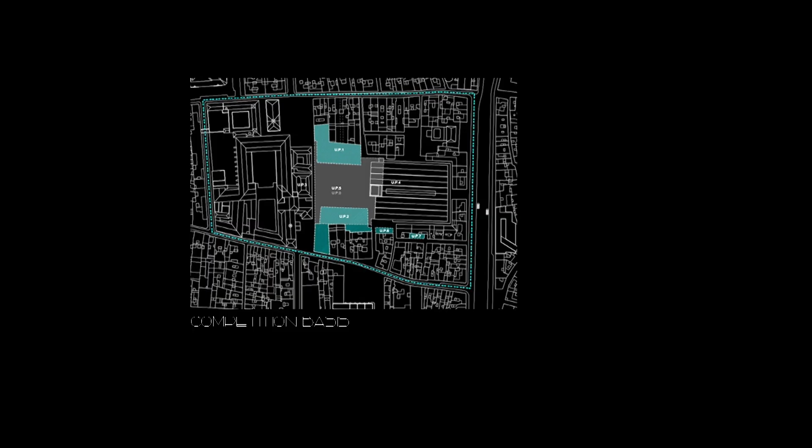And in a way, the competition gave this idea of geometry, and I said, no way. I don't want to express that, because on one side is housing, on the other side is a school. This is an area where a lot of different social classes cross over one another, and I wanted to express that.

I say it doesn't matter if this facade is beautiful or not beautiful, I don't want to stop this movement with a facade, with a block. This was the first thought and the first line that I made, to continue the facade of the building with my intervention.

And I draw and I make models with paper, it's my people that manage the computer, as you see. Okay, doesn't matter. You see at the end, there is the corner of the new school.

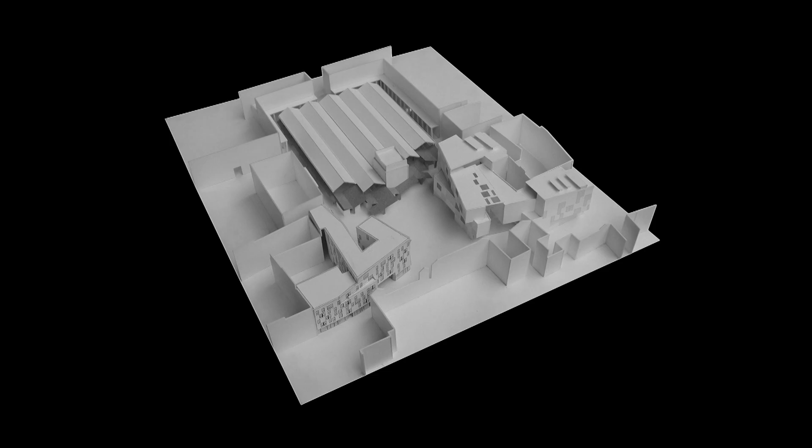The solution came when I thought: I'm going to dialogue with the roof, trying to find a solution to these 3 problems. The solution was to make a roof of small dimension that controls the sun, and this roof passes underneath the big one to also control the wind and rain - the protection for the wind was inside.

Also important for me was to put this building that you find in the middle into second line, passing this roof in front of it - this building that had too much protagonism in the past now passes into second line.

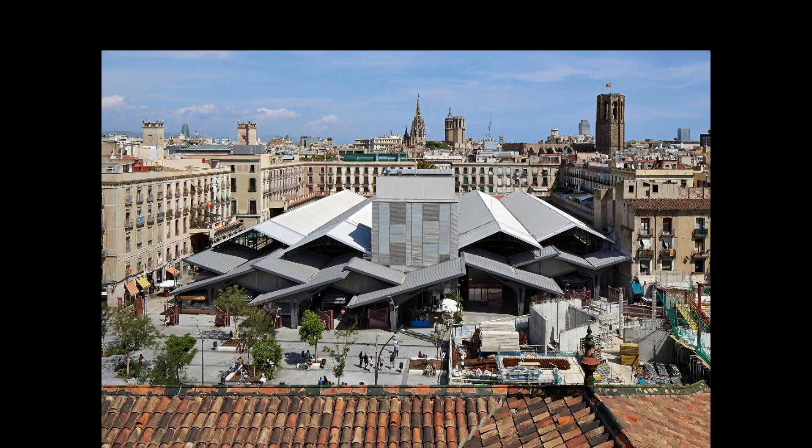This is La Massana, under construction. You see how I follow the rhythm, I enter into dialogue, because this space is a square where I make 3 facades.

But I didn't want to make my own square - I wanted to be part of the city, to sew it together. It's correct to see so - to sew the city that was broken in the middle. I wanted to sew, but enter in dialogue with everything I have behind.

You will see that here, the Boqueria - I talk with the Boqueria also, because the Boqueria has a strong memory for us, for the people of Barcelona. I make some continuation of the Boqueria. And you will see the housing - I also follow, entering into dialogue with the houses that are behind and near me.

We can go quickly through this. This is the housing. Again, we are here now.

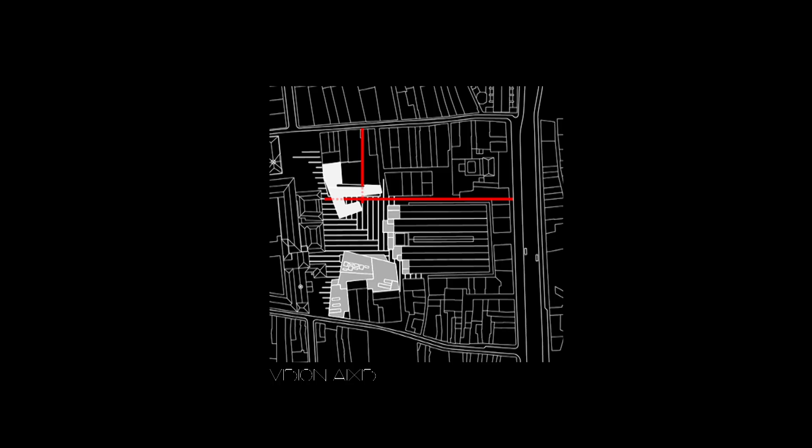This is the thing that worries me - this connection, not to interrupt this movement with my building. Because this movement was existing before me, and I say I want to respect all this movement because it belongs to the citizens. So I follow the thing that I find before me.

I must say here that all the square is empty, but nothing shows that it's empty, because the ramp to enter and also the ramp to go out is inside the intervention. And also all the ventilation is inside the new intervention.

We have enough air, and I make some kind of prominence - the square is like a big mound to have enough earth to plant trees. But also, to emphasize this angle and point of view, I plant trees only in this area, leaving this other part completely empty, because from here you have the perspective of the school, and it permits this area for activities and for meetings.

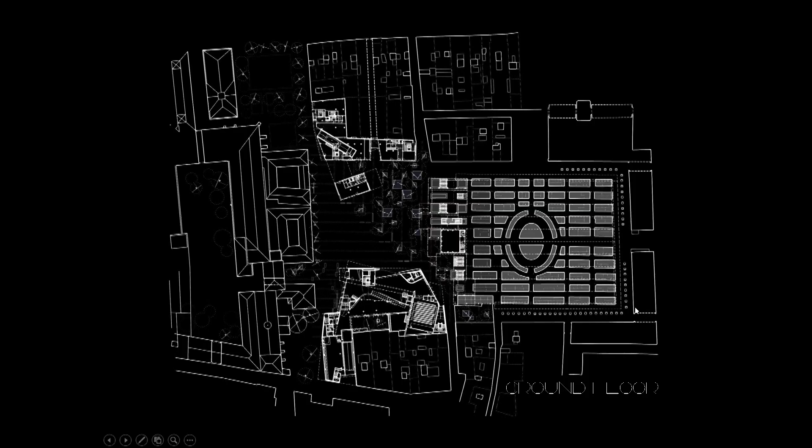Yesterday we talked about ornament, and I say that before, through the ornaments, the building had some kind of rhetoric and particularity. Nowadays it seems complicated, I don't know, architects don't manage to work with ornaments. To me, I find this plastic quality with the movement of the facade. I try to make in my buildings some kind of particularity, because each window is different, if you have a house here, this is your house, your window that is different from the others. And in a room, sometimes the window is on the side of the room, and others, and I try to make this abstract composition to give some kind of quality to the facade.

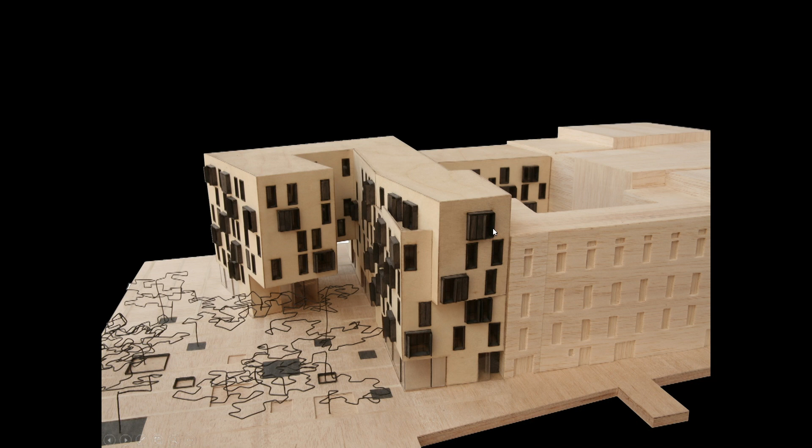And also, for example, the saloon, the living room, has the window up. I mean, the window is inside the wall, in contraposition, the living room is like a box that goes out. And that also creates not only movement in plan, but also in section.

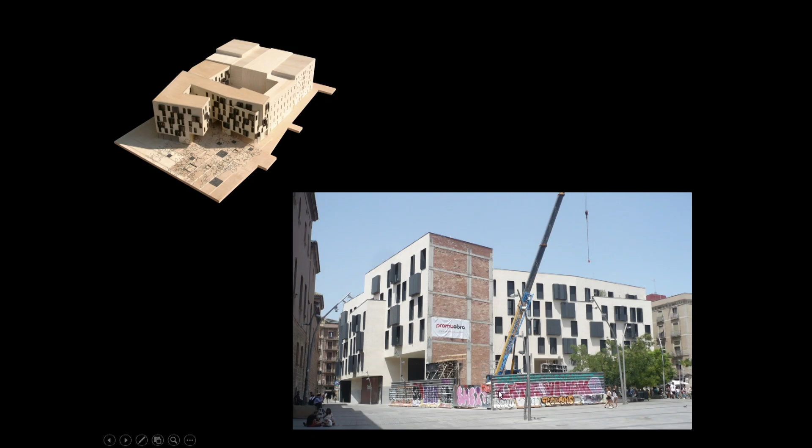You will see, we can pass. This is under construction. Here is the place, this part is private, and it's the legs, with the cantilever. It's going to be finished in 8 months, more or less. We can pass. This is the cantilever, and you see the corridor. We pass, and this is again the perspective.

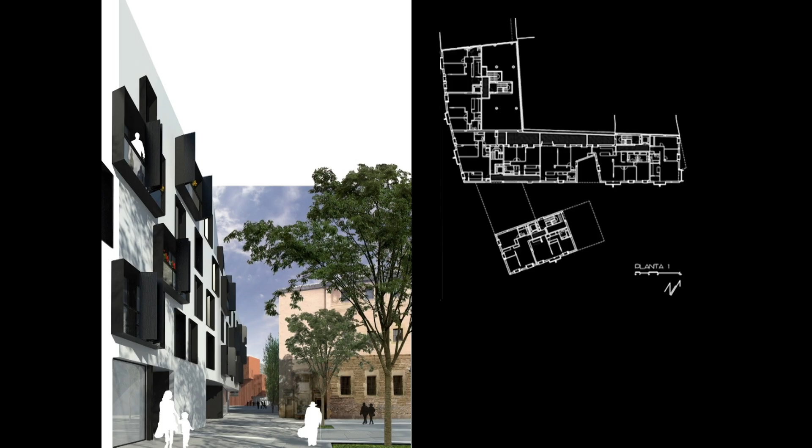We can pass. It's an abstract composition, but you see how the housing, I try to work with the same scale as the building that I have behind, the housing buildings, that the dimension is a domestic scale. And I try to work with the same scale in another composition, but following the same, and also all this movement, not to make amplification but to make the movement from one side to another with fluidity. We can pass, okay.

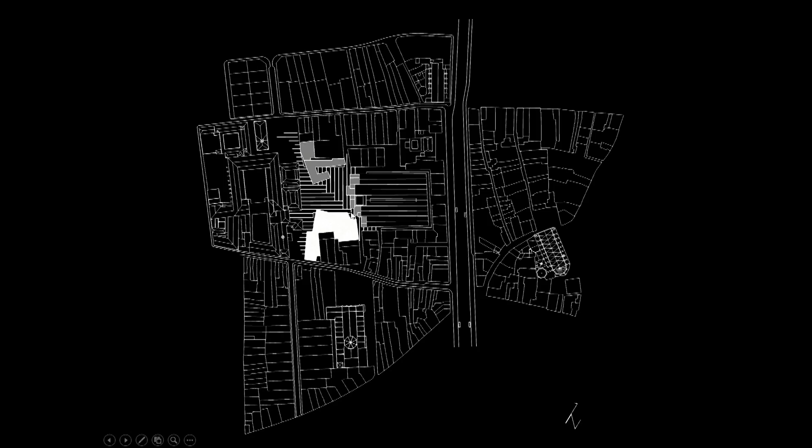Okay, we pass. Now the school, we are working here. I must say that this building is quite big, 11,000 meters, and 6 floors. It's big, and I wanted it to appear small. This was my worry, my preoccupation. And also, because this is an institutional building, here I work with a big scale in contraposition to the housing, where I work with domestic scale.

I must say that this school was here before. This is an old hospital, Gothic and Baroque, that for years has been the oldest school of Barcelona, of art. And they had this courtyard that belongs to them, protected from all the tourists and all the movement of the neighborhood, and they were very sad to move. But this building was not conditioned for fire, and they had a lot of problems, and the municipality decided to transform this into a library and to move the school here.

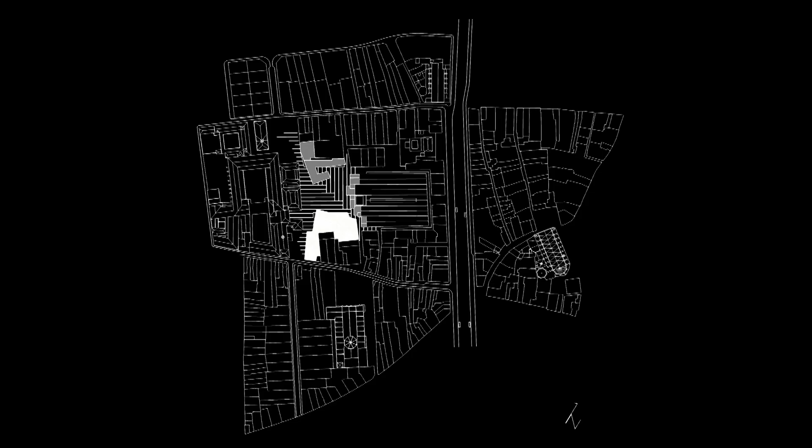And when I entered the competition, I went to talk with the professors, the teachers, and they asked me, they said we are worried to move into a very urban school, we want open spaces. But it was not possible to make a courtyard, and I thought of terraces. Okay, we can pass, and I make this small movement, you see, also to create terraces, and also because, as I explained before, I didn't want a building facing the center of the square. I wanted to give the square some dynamism.

And making this collapse, this movement, also permits to change the scale, you will see later, and to create all this terrace that is the place where the students go out, no? And how you see, the plant is so easy. It's two L's, no? This and this.

All the workshops are facing the street. This is the corridor, and here again the theoretic and administration face the courtyard. Here is a big courtyard. At the end of the corridor, because from this part of the building to another there is a different level, I communicate this L with the other with these stairs. And at the end of these stairs you find a terrace.

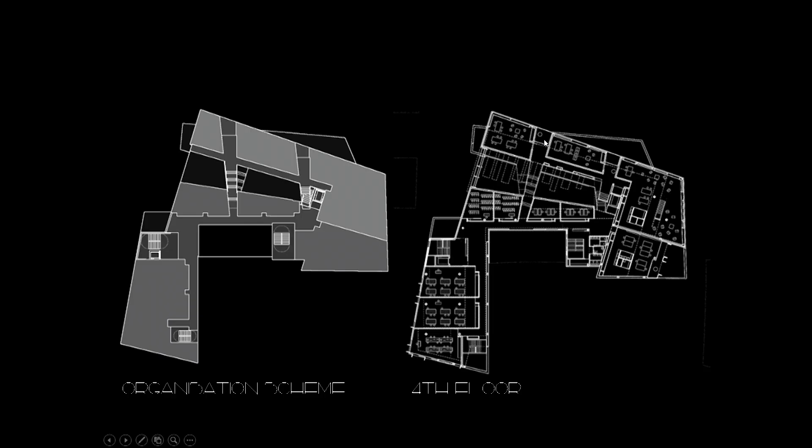I talk a lot, but the image is much better than my talk. We can pass. This, you see? Also to change the scale, no? Because you realize it's 1, 2, 3, 4, 5, 6 floors, but with this small movement, with this composition more abstract, you don't realize well the dimension of the building.

First, how I've broken it in two pieces, it seems smaller, no? And also the end of the stairs is changed. If I make one stair over the other, the reading of floor 1, 2, 3 is too easy. By making this small movement, in a moment one stair is here and the other here, and also when I arrive here, I change the composition of the hall, so this terrace is more aleatory, and the perception of the different level is not so clear.

And again, the corner is the point where I make the cantilever, is the point where I make the break, and this corner, that you see from far on the street, is the point of more tension of the building.

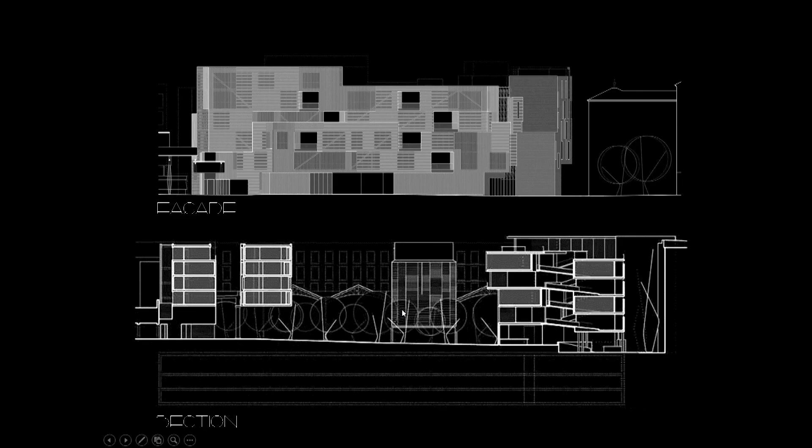We can pass, and here you see, no? Okay, this is the drawing from the competition. You see, here the roof doesn't exist, because in the competition - and you see how this awful building had enormous presence. When I received the commission at the end of the Boqueria, I was very happy because it gave me the possibility to control this bad animal.

We can pass, yeah, here. And you will see also this piece of brise-soleil is handmade - not really handmade, but it's not industrial, it's semi-industrial. And you see how it has a lot of different colors, because entering the oven in small quantities, each time the color is different. But I wanted that - I wanted that to give vibration. And also these errors, this quality of the material that is not homogeneous, makes you feel the material more.

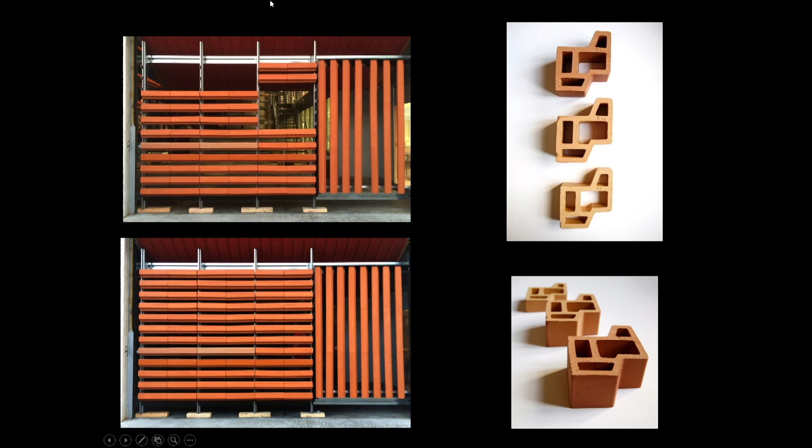Okay, we can pass. This is the brise-soleil. This is a proof - it was not ceramic, but sporex, to control the different distance. But you see the piece, no? The piece where the light enters here, but from the back. From the city you don't see the interior, but from inside you see the sky. We can pass. As this, we can pass.

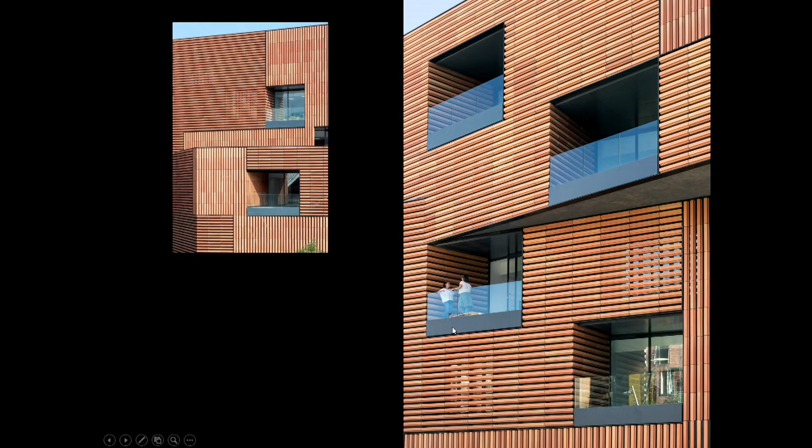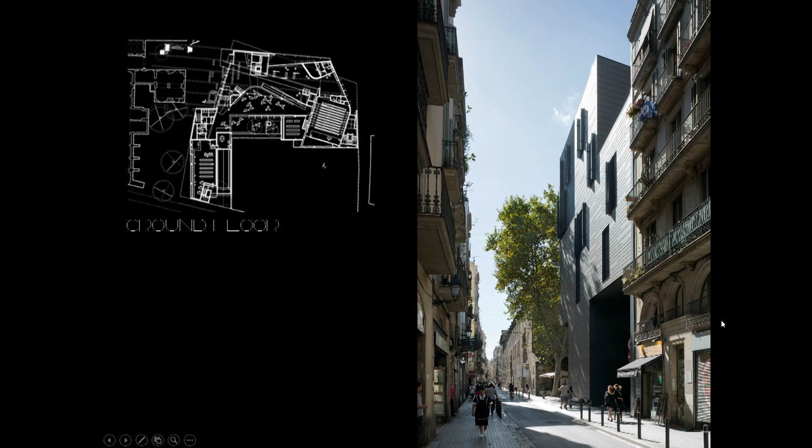When I arrive at the street, you see the building's back part is flat, more in the color of the surrounding, and the windows are smaller, not domestic, because it's a school, but more in consonance with the building near us.

We can pass. The same, no? And also trying this again, a cantilever, to face and connect more with the street and have more perspective. Also because in front there is a terrace, a theater.

We can pass. And here you see the corner. And in the interior it's completely different. I wanted it to appear like something more sculptural, more massive, protected from the exterior.

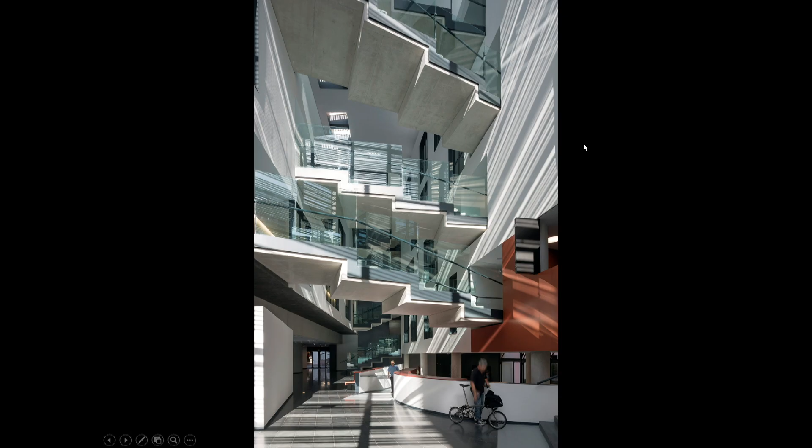But when we are in the interior, there's a lot of sun, and you perceive all the time where you are. This is the street, the stairs that move, and it's beautiful because in each moment of the day the shadow changes. This has some relation with the pavilion.

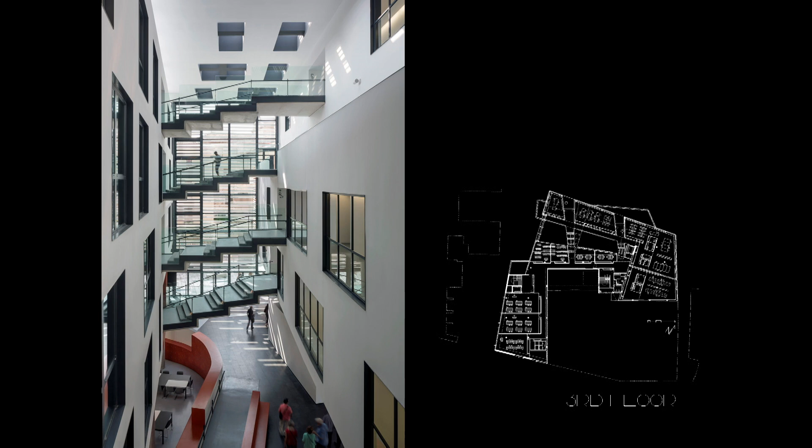That was made by the same architect, so it must have some relation.

Here, I wanted to transform this courtyard into something like a street. And the fence of the corridor, instead of appearing like a fence, appears like windows, the same as the windows of the classrooms, and the third facade is the ceiling.

This is the ceiling, and it can open. I am very worried about the circulation of air, so I made a project with transversal circulation.

If you don't want, they make me the obligation of mechanical ventilation and air conditioning, but this building works with no mechanical technology, because of the circulation of air. All this is open, and when it's very hot we can open it. Not always open, but they can open.

We can pass. And the interior of the classroom, the workroom, the studios - you see it's transparent enough, but from the exterior they are completely solid.

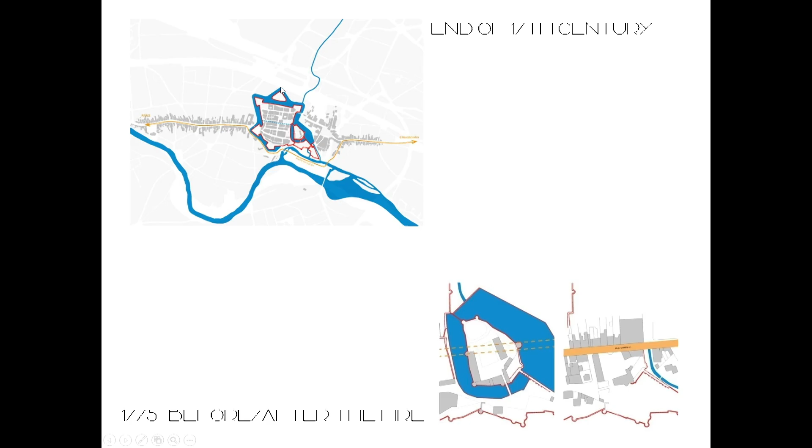And they decided, with no problem, to cut through the castle to connect this street with the other, and that's all. Things started to disappear because the need for the walls of the city as protection of the frontier was gone, and it became an industrial city.

We can pass. This is the period that started making canals, because Saint-Dizier became a place for foundries, for iron foundry. All the furniture for the city, in the industrial city, all the benches were made in Saint-Dizier.

And they created all the canals to transport the material. But today Saint-Dizier has disappeared as an industrial place in this way, and they don't need the canals, and again all the canals disappeared. So Saint-Dizier is a city that is very difficult to recognize its history, because part of it belongs to things that are dead.

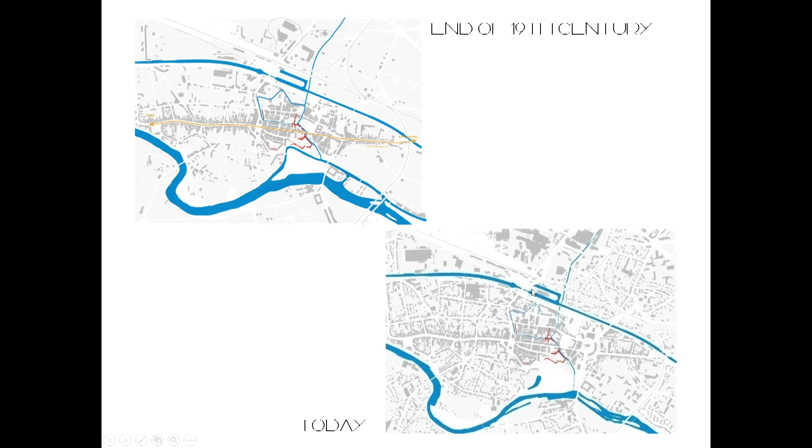And I try again to show not only the space, but to show the history. You understand? To show the identity of the village.

We can pass. This is the scene showing that all this was made in Saint-Dizier. They used to make this kind of things. All this was made in Saint-Dizier, but no more.

Maybe we can pass, we can go back. I changed it, but no, later. This is my project.

I also like, when I work at a big scale, to transform each project into a very simple sketch. And this is the project. What is this project? This is the canal, this is the river.

And I said, I want to make a promenade, an open space, because nowadays the public space is different, because people don't just promenade anymore—they do footing, bicycle, they are much more dynamic. It's not like before, walking with an umbrella, with the baby. It's more dynamic. So I said, okay, I'm going to make a longitudinal public space.

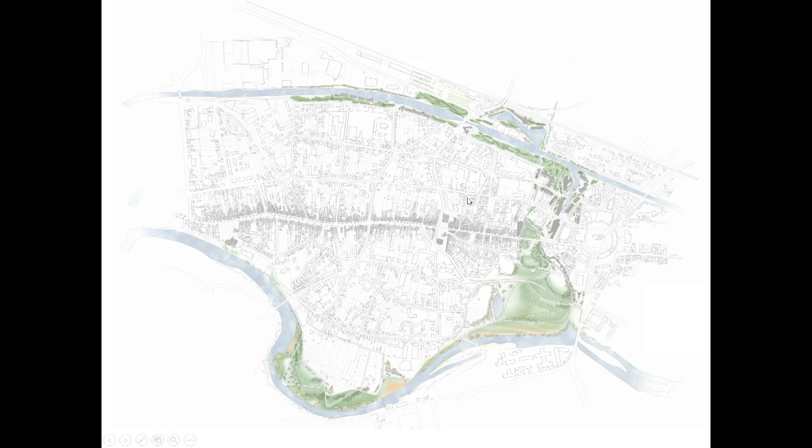Now we are doing all this area. I don't have a photograph, but it doesn't matter. It connects with this existing square, all the acts of commerce. Okay, we can pass.

Okay, and I present my actuation, the image with which I won the competition, which is working but with a lot of changes—but essentially it's okay, it's working. We can pass.

This is the transformation, you see the castle. I made it in front of the castle. I suggested to them to move the market that was there—sorry, here—whoops, disappeared.

Here, the market that was here, I propose to remove it, and to create in front of the castle a public space. And also the canal, I bring the canal inside a little, and near the canal houses, and make the concentration of houses in high buildings, to make the transition to the high buildings behind. I try to give some coherence to this.

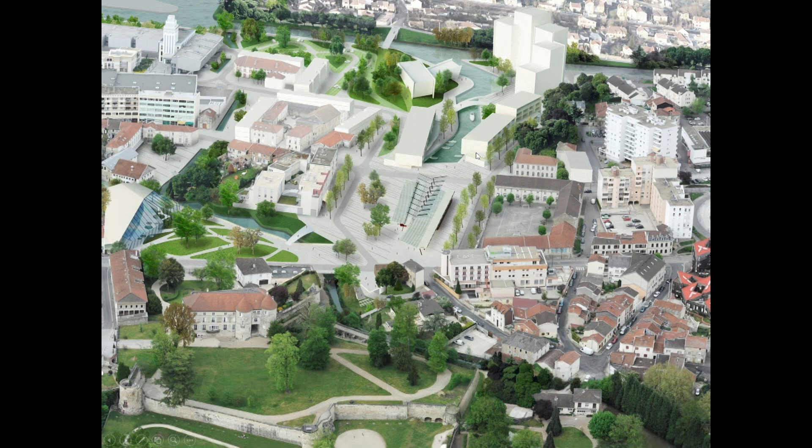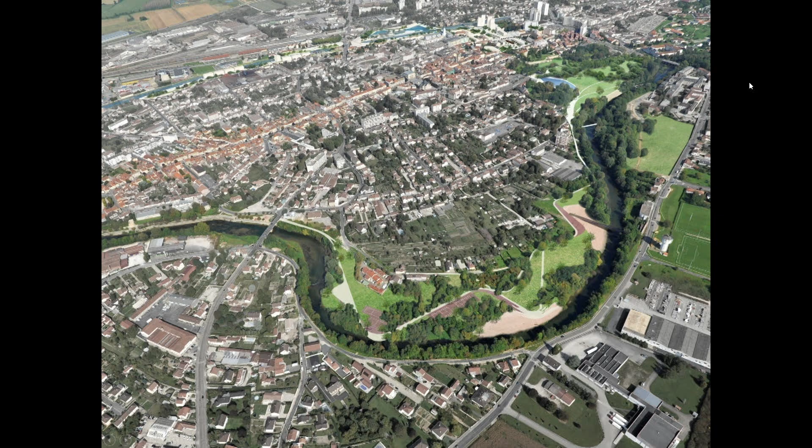We can pass. This is the image that I gave to the municipality for the competition. It's to transform all near the river into public spaces to practice play, games, and you see here the commercial area.

I propose also, back please, a potager, let's say, a garden for the cultivation of the community, for tomatoes and so on. This is the public vegetable garden.

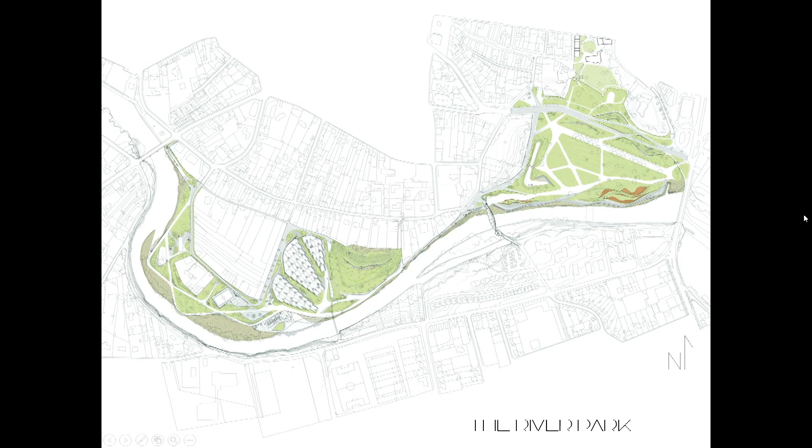And now we are in the period to clean the forest, and I must go because I don't have the control. It's the municipality. I make the plans, but they don't permit it. They want to be free.

It doesn't matter. I am not accustomed to this way. I like to control everything, but sometimes it's not possible.

And now it's some houses, social houses. I have to project more, but I thought it's too long. Five minutes? Yeah, one more, we can pass.

This is in Madrid. We can pass. It's a terrible area in Vallecas. This is the way the city is done now, housing like merchandise. The streets, not like public spaces, but like the way to arrive to the plot, the house. It's never with an idea of city.

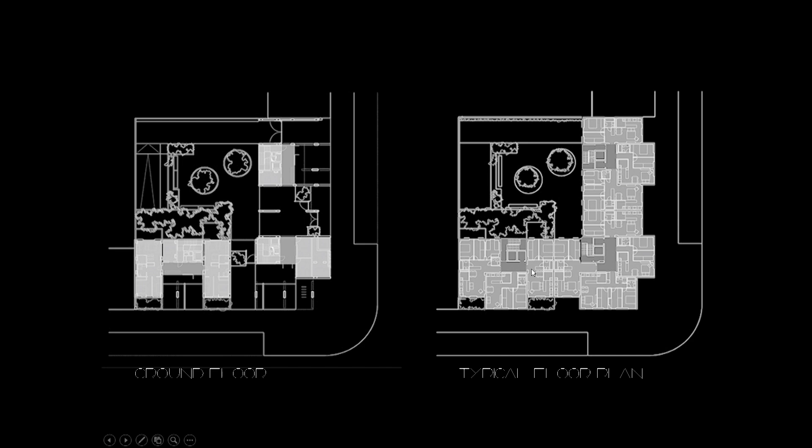And you will see here, with this small movement, I make some kind of vibration to the building inside to make a corner massive. We can pass. This is also social housing, very cheap, but it's full of this passage.